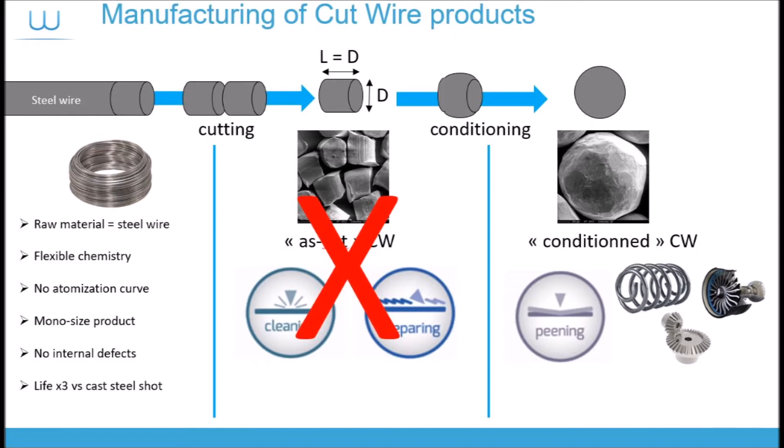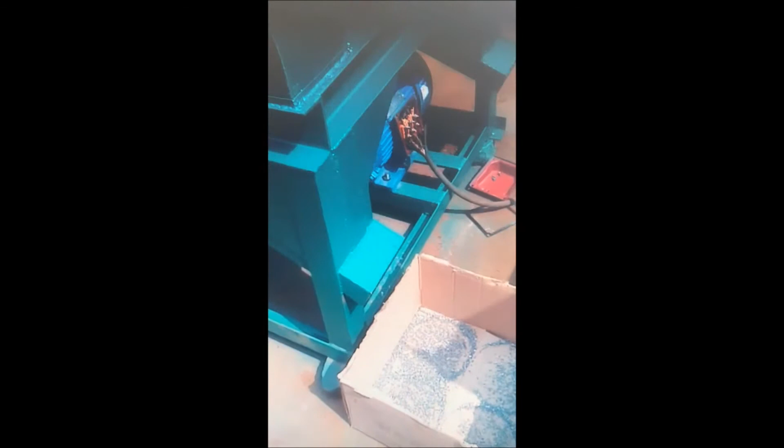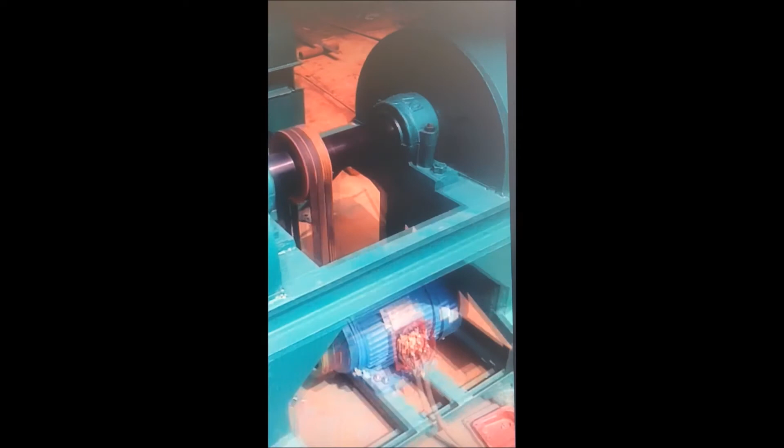As you can see, in this operation, there is only one single wire with the right diameter, which is cut by one or two rotary blades. Of course, this operation provides a very low level of productivity. The following example comes from a low-cost and low-quality cut wire manufacturer, but the production principle is the same for any cut wire manufacturer.

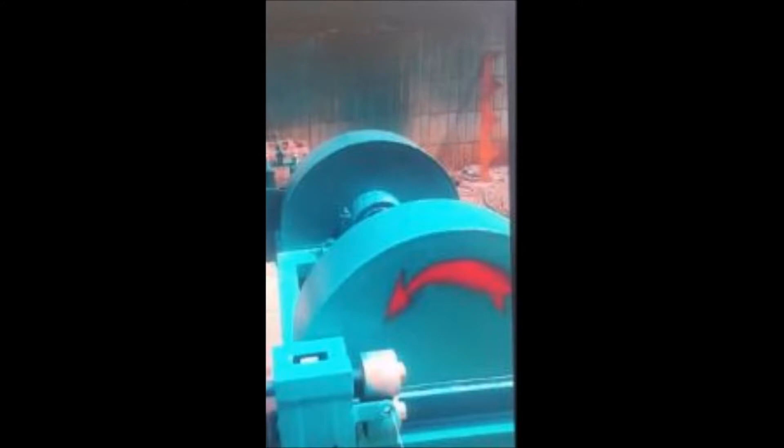Knowing that the original wire is very soft, maybe you wonder how it is possible to obtain cut wire abrasive from 300 to 800 Vickers. Usually, it's not due to thermal treatment. It's not a very popular method. The hardening of the particles is made during the conditioning process. I mean, the conditioning is not only to give a shot shape to the particles, but the aim is to give the right hardness to the particles.

And this hardness is obtained depending on the time of conditioning and the throwing speed of the particles. The longer the time, the better the shape. The higher the throwing speed, the higher the hardness of the abrasive. So it means that a cut wire particle is pre-shot peened because there is an internal stress inside the particles which gives the right hardness.

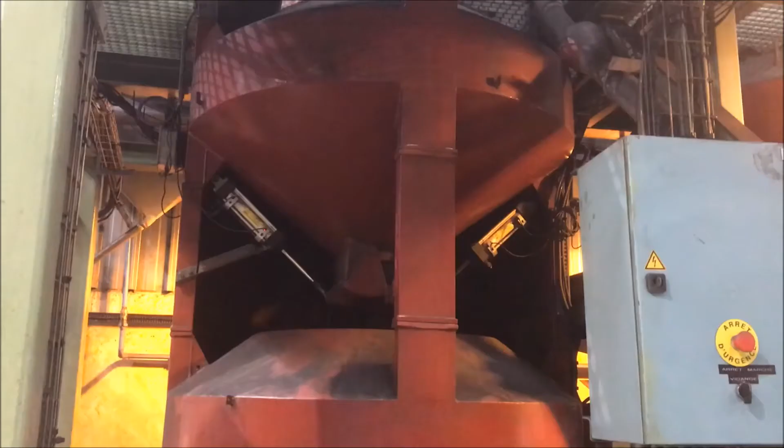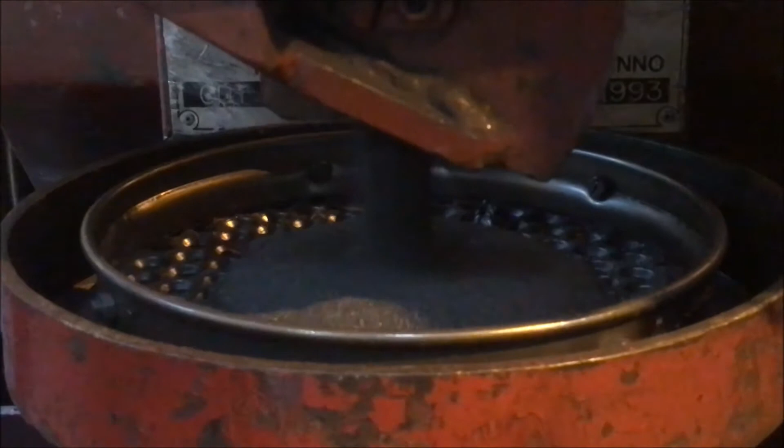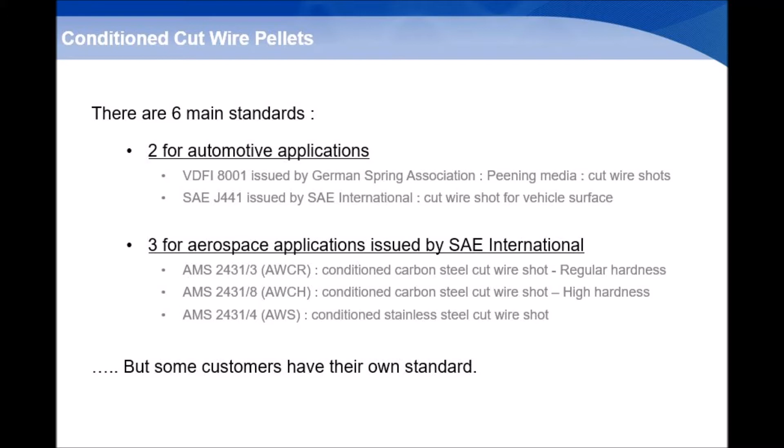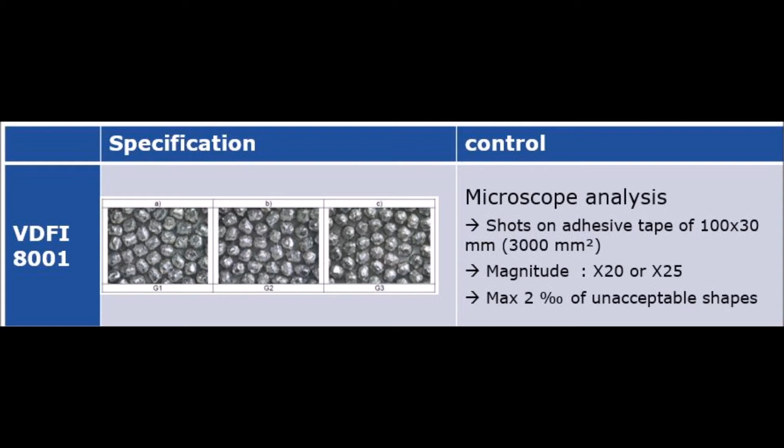Now, let's see what are the specifications for conditioning. First level, SAE says pre-rounded edges and no more. So it means that the SAE standard considers that the G1 conditioning level is enough. The VDFI standard is more accurate because they consider that a specific number of grains stuck on a specific surface must meet at most a few particles with non-acceptable shapes, and this level of bad grains is expressed not in percentage but in per thousand. So it means they allow 2 per thousand or 4 per thousand particles controlled.

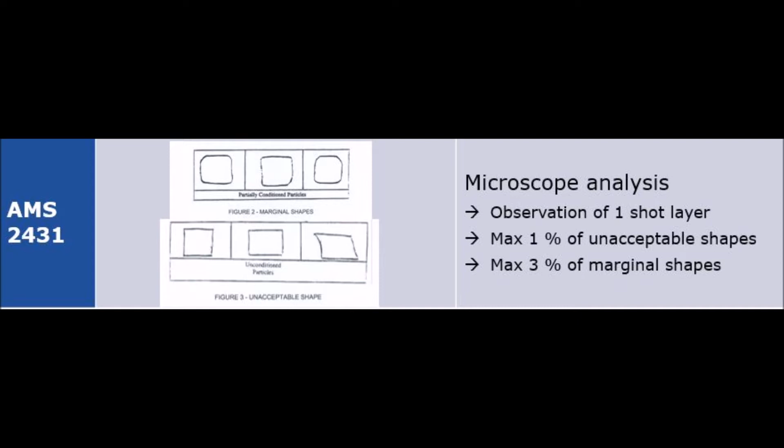For AMS, the standard is simpler to understand because they define a specific level of marginal shapes and non-acceptable shapes depending on the size of the cut wire.

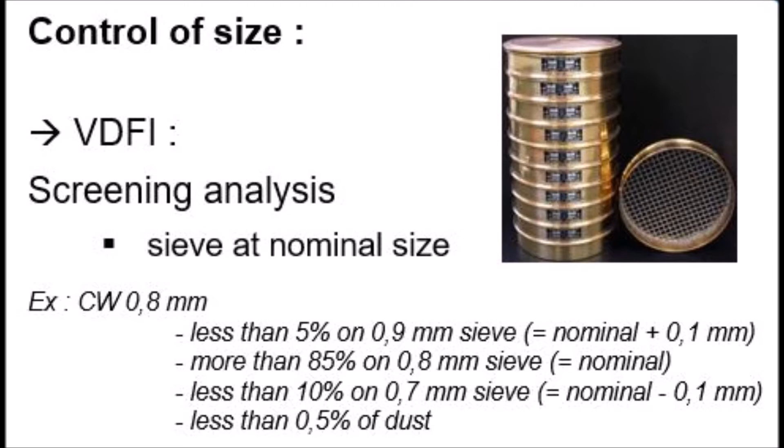Let's see now how the size of the cut wire is measured depending on different standards. For the VDFI standard, the method is quite the same as our method. I mean, they use sieves, but with very narrow specifications, as you can see on the screen. So it means that 85% of a product is retained on the nominal size. So all the grains are very concentrated on only one sieve, knowing that there is only 5% allowed on the sieve before. For SAE and AMS standards, the size distribution is controlled by the weight based on a specific number of particles depending on the original size.

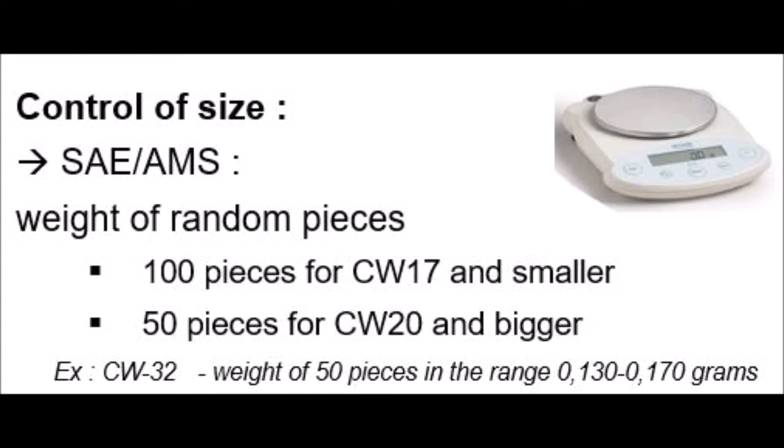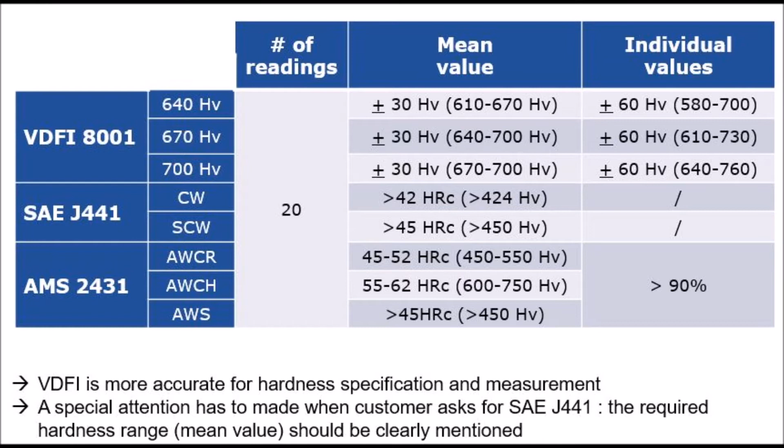Let's see now how the hardness is measured depending on the different existing standards. The VDFI standard specifies that the mean hardness must be between specific ranges depending on the level of hardness, plus the fact that all individual measurements must also be within a specific range. The SAE standard just specifies that a minimum hardness must be achieved, but there is no maximum. So tolerance is very high. The AMS standard also gives specific hardness ranges for the mean calculation, and 90% of the individual measurements must also meet the range.

Of course, you can find different chemistries of cut wire. We will focus today only on the high carbon chemistry. And as you will see in the next screen, the chemistry is not very different compared with our abrasive, and the standards also don't make a big difference between chemistry requirements. So it means the benefits of the cut wire are not due to its specific chemistry, which is basic.

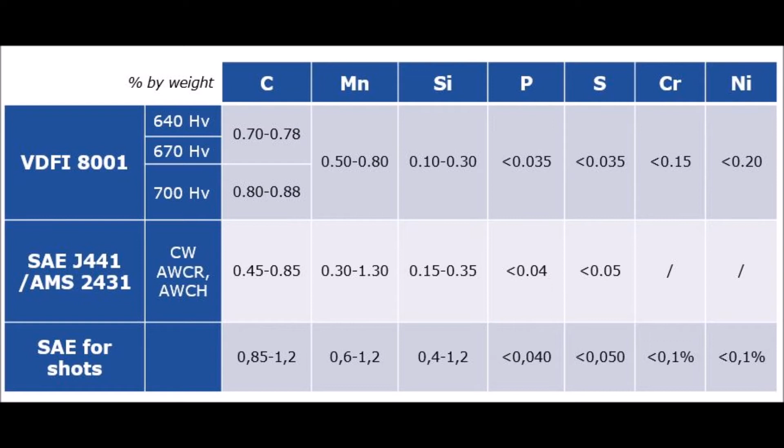As you can see, the chemistry of cut wire is not so different. The only difference is due to the carbon level inside the material, which is a little bit lower than our shot. The reason is very simple. It's because on the market, a wire with 1% of carbon doesn't exist. So that's why they had to adapt the standard to this reality of the market.

So of course, cut wire has different advantages. We can obtain a very high hardness in order to peen very hard parts. But one of the main benefits of the cut wire is also its very low level of consumption. Keep in mind that for the same hardness, the difference of consumption between cut wire and shot is 3. I mean, consumption of cut wire in the same conditions and for the same hardness is 3 times lower. So maybe you wonder why quality and lifetime are so different.

This is due to the manufacturing process. As you know, our shots are atomized, and due to this atomization process, there is internal stress which makes the grain sometimes brittle and which increases the consumption.

For the cut wire, this is totally different. Knowing that the cut wire pellets are coming from a wire, this wire is very dense, there is no hollow inside, all the material is very cohesive, and something more, all the microstructure inside the cut wire is in the same direction. In our shot, the microstructure is mixed, and that's why the cohesion inside the grain is weaker than the cut wire.

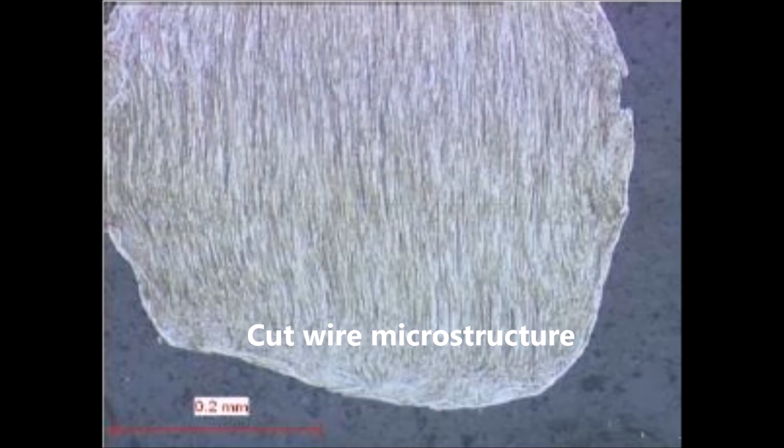On this picture of microstructure of cut wire, we can see that all the lines, all the so-called fibers, are in the same direction, which provides a very good cohesive behavior of the particle, and which explains that consumption is lower because the grain is stronger.

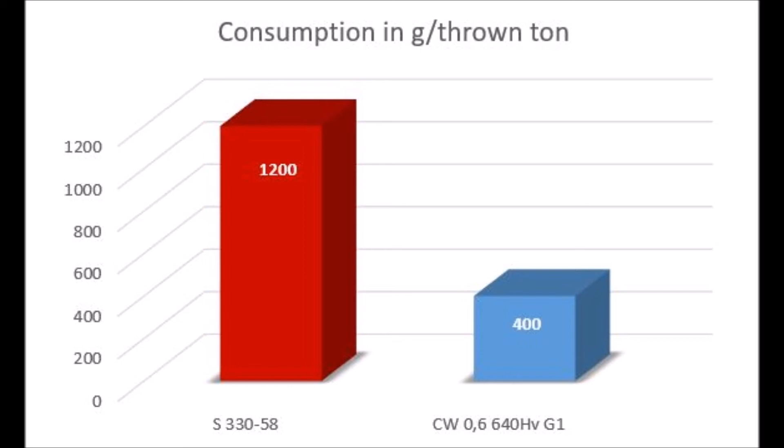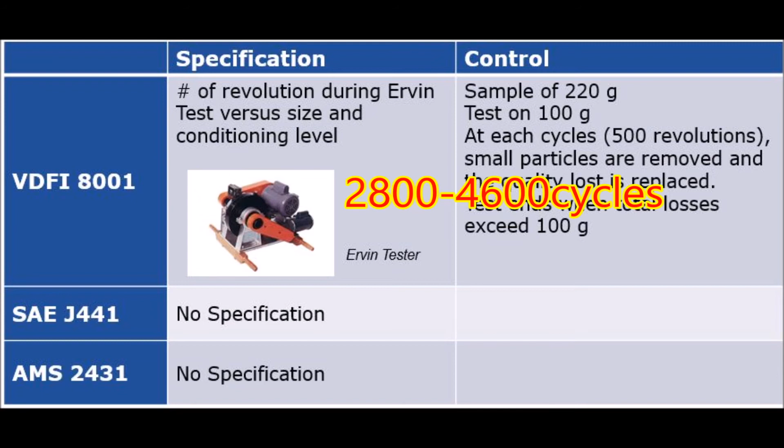And the last parameter evaluated by the standards is the lifetime of the particles. As you can see, only VDFI requests a specific lifetime of the cut wire. So this lifetime is between 2800 and 4600, depending on the size of the particles and also the conditioning level and of course hardness.

Maybe you already experienced that cut wire designation through the standards is really a nightmare to understand. Let's see together what is the meaning of this strange alphabet. So sure, VDFI standard seems really amazing, but in fact it's quite easy to understand. The first three letters mean cut wire in German language.

Second group, conditioning level, G1, G2, G3. The third number is the size of the cut wire. Then hardness in Vickers and the original specification.

For SAE standard, it's again more simple because the two first letters are for cut wire. Then the number 32 is the diameter of the original wire in thousandths of inches, and then the two last figures are the hardness specifications.

AMS standard is also quite easy to read. The first letter A means AMS spec. Then H means the hardness range, high. And the last number means the diameter of the original wire in thousandths of inches.

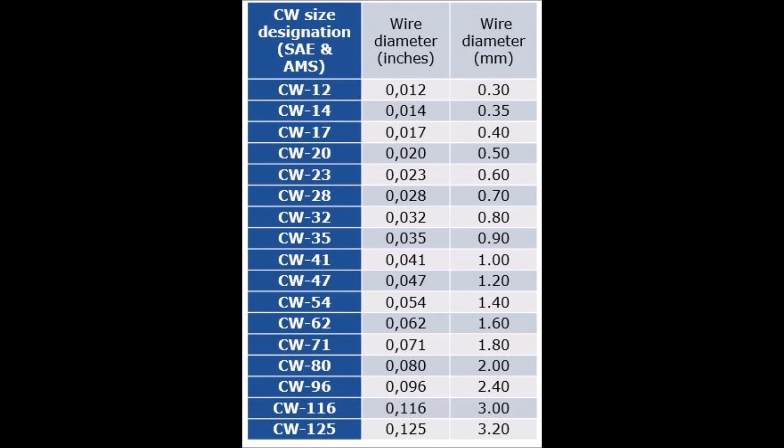On this table, you can find the correlation between the commercial designation and the diameter of the wire in inches and in millimeters. Let's see now in which applications we can use this cut wire. You can see here that the main application will be road transportation in the following applications: helicoidal or leaf springs, gears, stabilization bars, and so on.

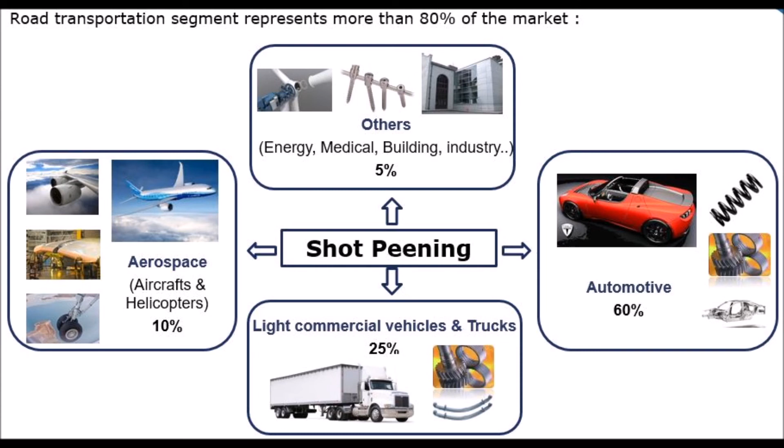Aerospace in shot peening will be dedicated to landing gears, safety equipment, or parts of the engines. So now, the time where cut wire was seen only as a competitor is over, because we are able to submit the same very good quality on the market.

We can approach aerospace business, but the most important for this kind of customer is whether your product meets their specifications or not. So no problem, we can. And on automotive business, now we can submit very high quality products, plus your usual technical expertise on the field, I mean, with all the new tools we have developed over the last few years.

And don't forget that on top of all this technical service, every time you make a machine check at a shot peening customer, you will of course have to check by yourself the Almen arc height, either with the customer device or with your personal comparator, to know what is the intensity delivered on the parts through the Almen arc height. So I hope that now you're more comfortable with cut wire and shot peening operations.